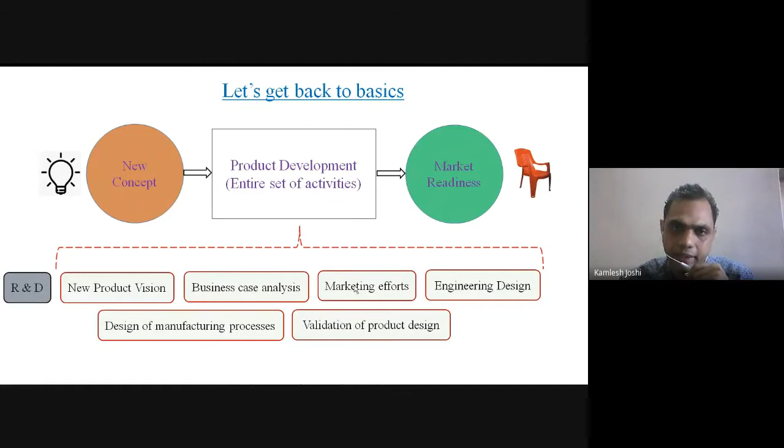So product design is a set of technical activities. We have a set of technical or engineering activities in product development, and a set of non-technical activities. The set of technical activities within the product development process is product design. It is aimed to meet the marketing and business case vision, and establishes solutions to problems not solved before.

Also, it provides new solutions to problems which have previously been solved—that is, creating new solutions to existing problems.

Previously there were different photocopiers, different methods to copy. When laser photocopy came, it disrupted the previous market. So whenever an original invention happens, it disrupts the previous market.

However, there is a higher risk with original invention. If the invention does not work in the market, we don't know the mood of the customer—how they will adopt the technology, whether they will adopt it at all, or at what pace. So there is high risk associated with original design.

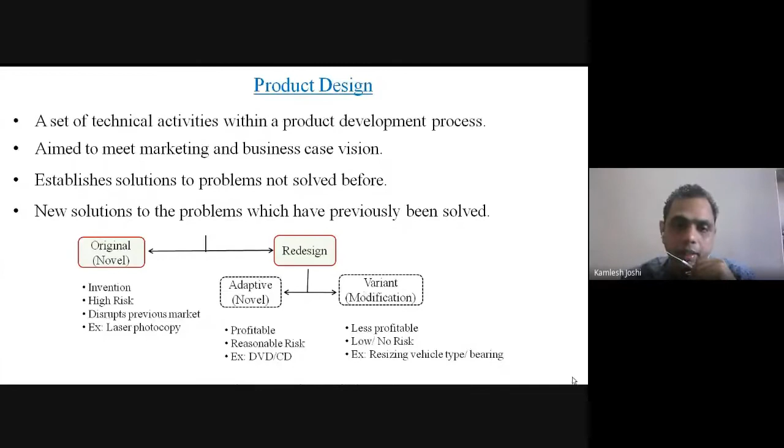So we can see DVD is an adaptive redesign, which is profitable with a reasonable risk. The risk may not be as high as original invention, but it still has a reasonable amount of risk.

In variant design, we are not doing any novel invention, we are just doing modification. We are changing the size, shape, and parts.

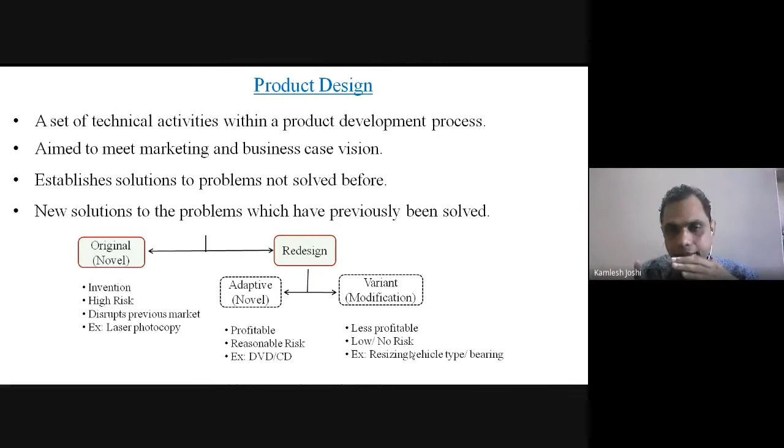We are resizing it in one way, like the newer versions of a car or the facelift of a car—they are just resizing, just changing the size, making the vehicle larger or smaller. They are changing the bearing, its size or shape. So they are just making a variation of it.

Variation is not as profitable as original or adaptive design—it is less profitable. However, the inherent risk with variant design is also low, so people also do variant redesign.

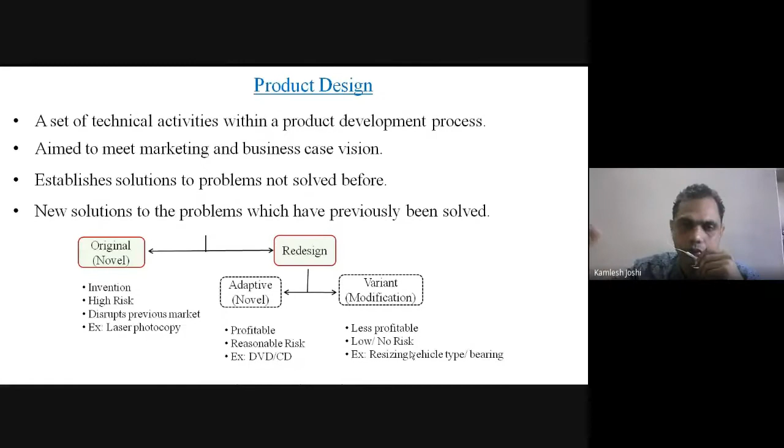In product design, we will focus on engineering design. Engineering design is where modeling is used to attempt the design task, done to make the process quick, accurate, and cost effective. There are different types of engineering design: mechanical design in the mechanical field, and in electrical engineering, electrical engineering design, architectural design, and industrial design.

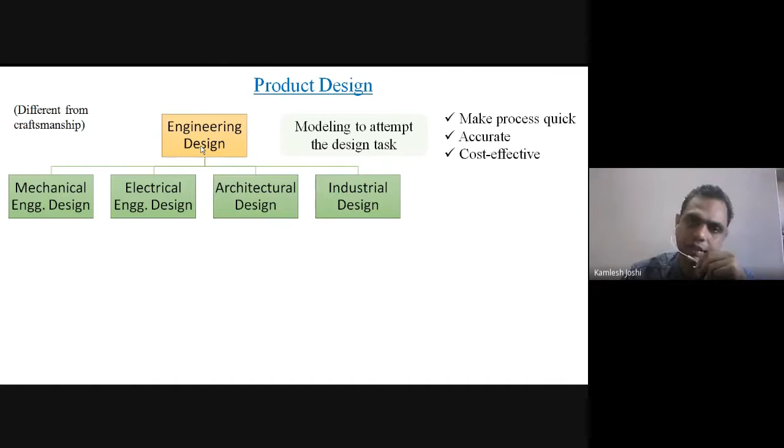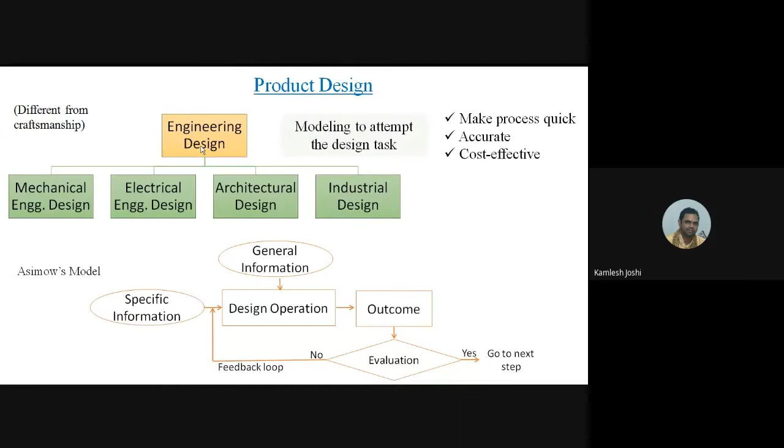A general process of how engineering design is done is given by Asimov's model, where we have some general information and specific information about a product, which is taken care of, and the design operation is performed. The output is then evaluated to see whether it gives the satisfaction we want from the product.

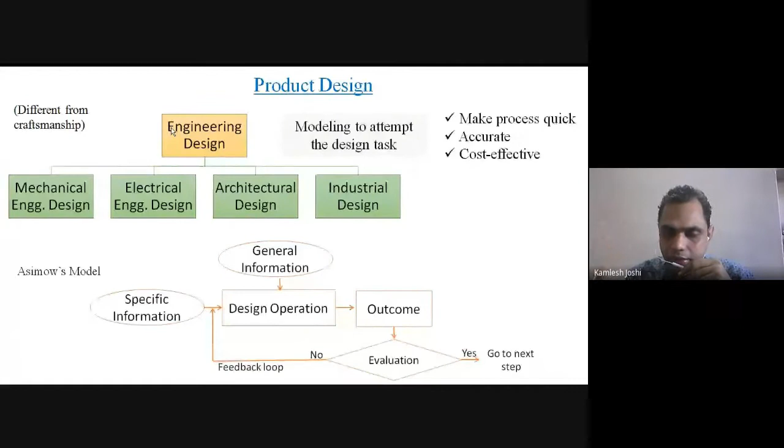If it is not satisfactory, then specific information is provided again—what are the needs still lagging in the product—and the product is refined for that need.

So in order to understand product design, we have to understand the product development process, because product design is a part of it. There are some basic steps in product development, technical or not, and it is advised for a product designer to be with the product development team to understand what is going on from the first process up to where product designing starts. So we have the modern product development process.

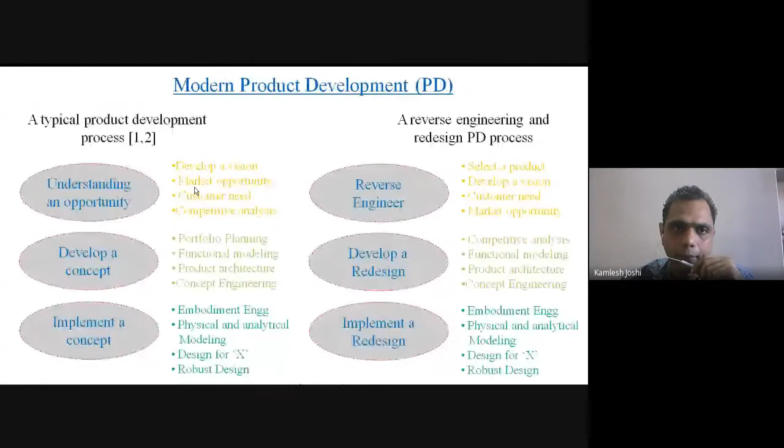The first step is to understand the opportunity. For understanding the opportunity, we have to do market analysis and customer need analysis. We will look at market analysis. In market analysis, we have to ask: what to develop? That is the first question that comes to mind.

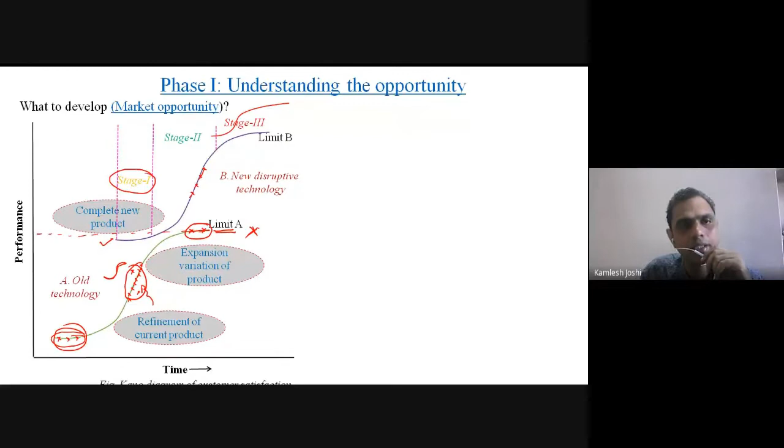If the technology is in stage one, it is a very good stage. We can go into the market, do some refinement, improve the product and deliver it. If it is in stage two, the competition is very high, but the chances of getting success are moderate.

But if a product is in stage three, it is very difficult to improve the product at this stage, and also very difficult to form a new concept which will destroy the current state of the product and create a new S curve to follow. If we are looking for a new concept to disrupt the old technology, the risk of failure is very high, but if the concept succeeds, the profit from it will be very high. So we have to see at which state the product is, and then understand the opportunity in the market based on the current state of the product in the S curve.

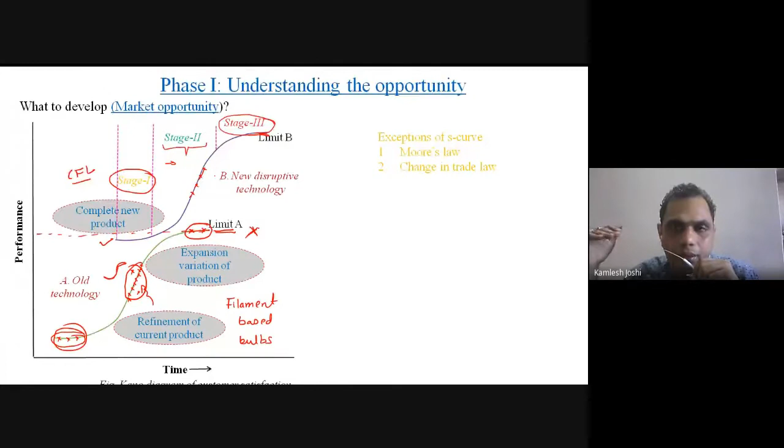So this is the limitation of the S curve. If some trade law changes, or government policy changes, then our product will not follow the S curve. Another exception is Moore's law. So what is Moore's law?

Moore's law tells us that the number of ICs, the number of transistors on a unit surface area of an IC, gets doubled every 2 years or 18 months. So if you can see from the 1960s, when IC technology started, it does not follow any S curve—it just follows a straight path, and it keeps on increasing.

Until now, it is just following this straight path; it has not followed the S curve. However, we can divide this straight path into a number of small S curves, because the electronics industry is changing at a very fast rate. So this line is actually following too many S curves, but they are not very big—they are very small S curves.

The size of the S curve depends upon the rapid growth in the technology, and these small S curves are making a line. So there may be a point in the coming 2 to 5 years where Moore's law will stop, and transistors will not follow Moore's law anymore. That may be a chance.

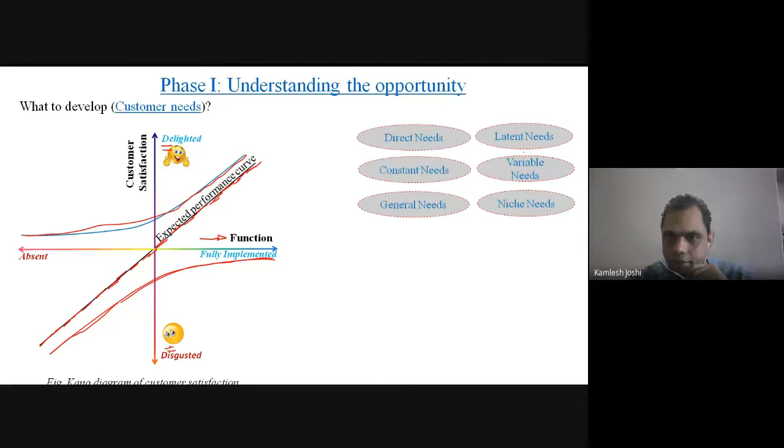There are some needs which are latent needs. Latent needs are those which the customer needs but will not tell directly. We have to ask a lot of questions over time so that the customer understands and then tells us these needs. Latent needs are those which help in delighting the customer, because the customer does not expect these needs. So these are unexpected.

Direct needs are something which the customer always expects.

Then there are constant needs, variable needs, and general needs which are required by all age groups and all genders, irrespective of age or gender. And there are niche needs, where only a certain small group of people need those needs. They are not highly required by the general population, like a highly good music system in a car — it is not required by a lot of customers, but it will be the requirement of a niche need.

So we have to classify different needs: what are the needs expected by a general customer, and what are the needs which will delight the customers.

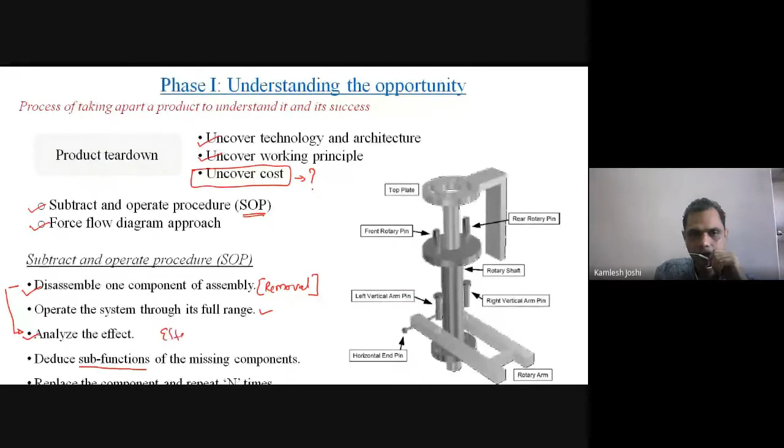First, we have to disassemble any component from the assembly. We'll disassemble one component from the assembly. After disassembling it, we'll operate the product through its full range and analyze the effect - what is the effect of removing one particular component from the product? This will help us in deducing the sub-function of the missing component. So we removed one component, operated the product to its full range, and now we can see the effect. This effect helps us find the sub-function of the missing component.

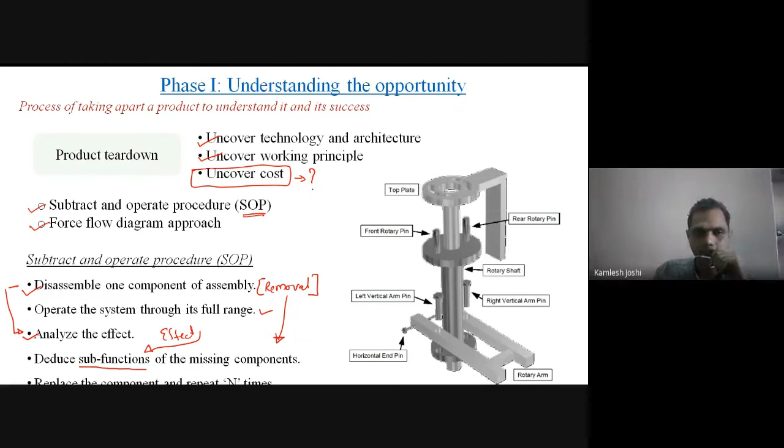Then we will replace the component to its original position, and take another subcomponent of the assembly, remove it, and repeat the procedure for all the components. So this is what we mean by replace the component and repeat the procedure n times. We can understand this with the help of a diagram.

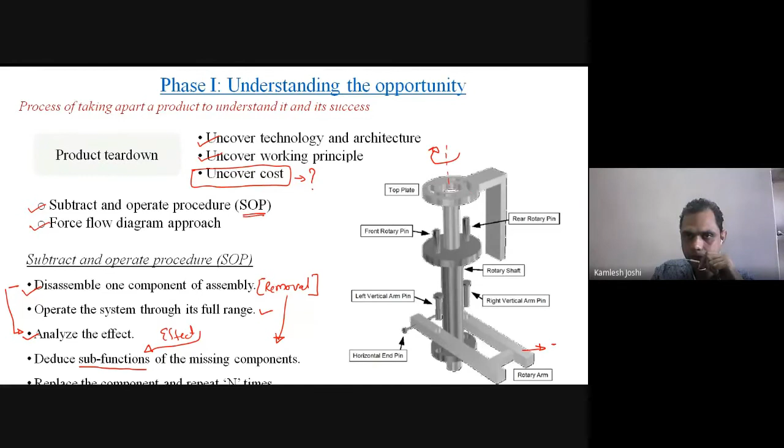So this is an assembly which converts the rotary motion of this arm. We have this arm which has a rotary motion, and it converts into the to-and-fro oscillation of this arm. So this is a top plate, and there are some slots in the top plate. The diagram is not that clear from the book, so let me draw it.

These are the slots, and in these slots there are two pins. This is pin number 1, and this is pin number 2 - the rear side pin and the front side pin. They get inside this slot. So when this part moves, it helps in moving this main shaft. Because this shaft is attached with this pin, it will move, and when these pins go inside this rotary arm, the arm will rotate to a certain angle.

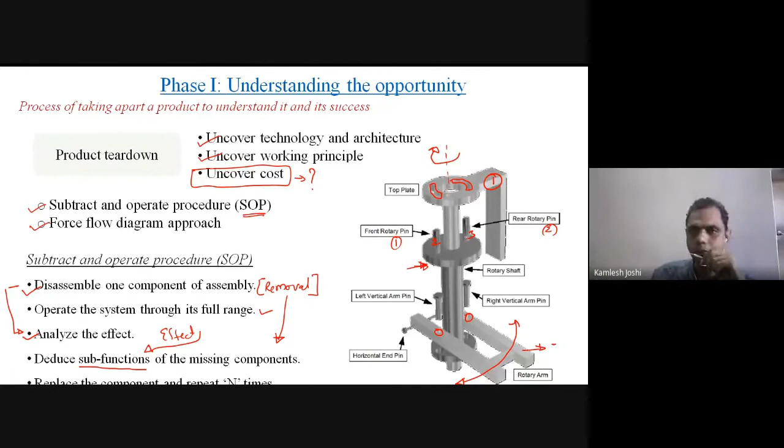We have to apply the subtract and operate procedure on this product. Let's start by removing the first part. This is part number 1, this is part number 2, part number 3. Like this, we can number the various components of the assembly, and then we'll remove them and operate the procedure.

We can remove the first part, and then rotate. You can see that if we are rotating, we are not able to provide any input to the assembly, so nothing will happen. So we can deduce the sub-function of this part is to provide rotary input to the system.

Similarly, we can replace the pins. If we replace the front rotary pin and operate the assembly through its full range, nothing will happen, because there is an additional pin here. So what we deduce from here is that the pin is a redundant pin. We don't need two pins at this position; only one pin is enough to transfer the motion from the top plate to the rotary shaft.

Likewise, here also we have two pins which are transferring the motion from the rotary shaft to this rotary arm. If we replace any one pin, it won't affect the function of the product.

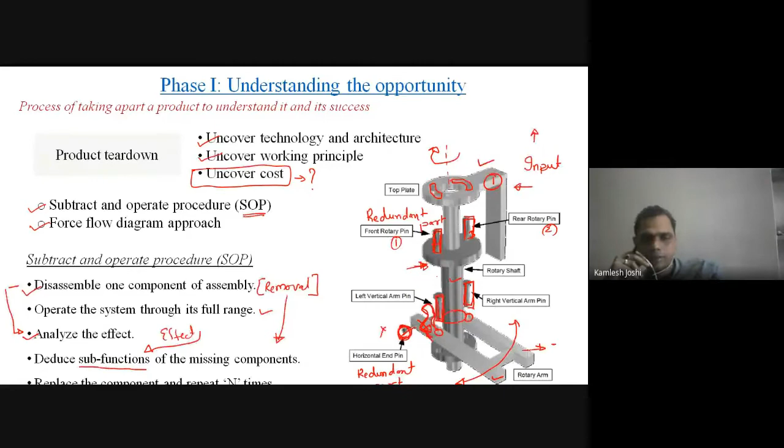Then, benchmarking by function. We have to benchmark by function, not by component. So any component in one product may not be functionally equivalent to a similar component in another product.

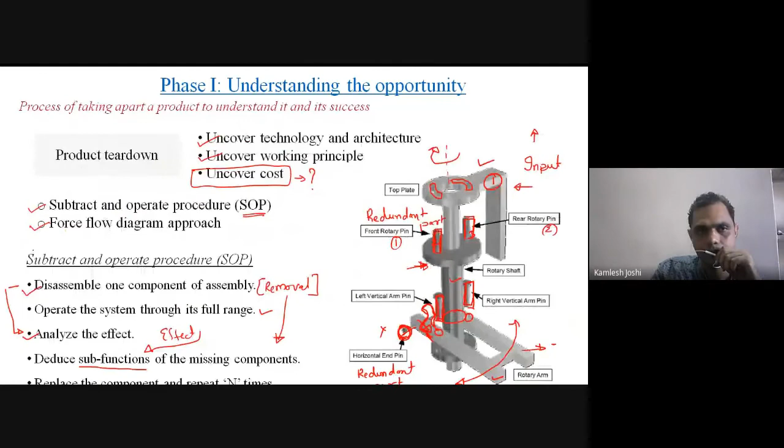This will provide a list of successful products in the market along with the design key issues. What are the key design issues for which we have to tear down the product?

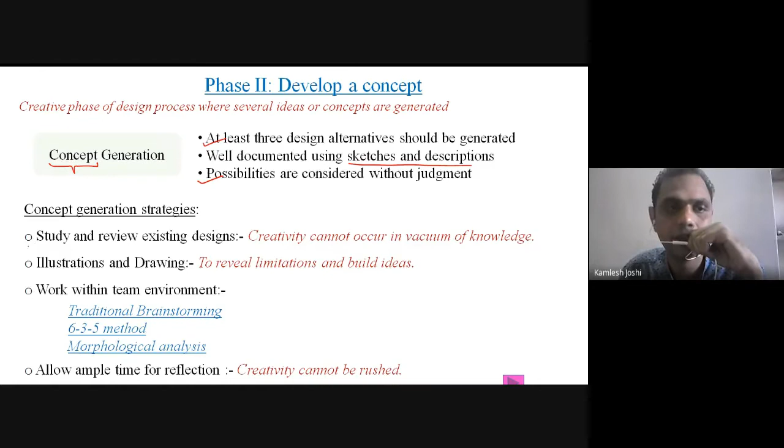Various concept generation strategies require us to study and review existing designs, know customer needs, and have an idea about the product from the previous step, because we have done the benchmarking and analyzed the market. Now we have to provide a solution, generate a concept, and study and review existing designs.

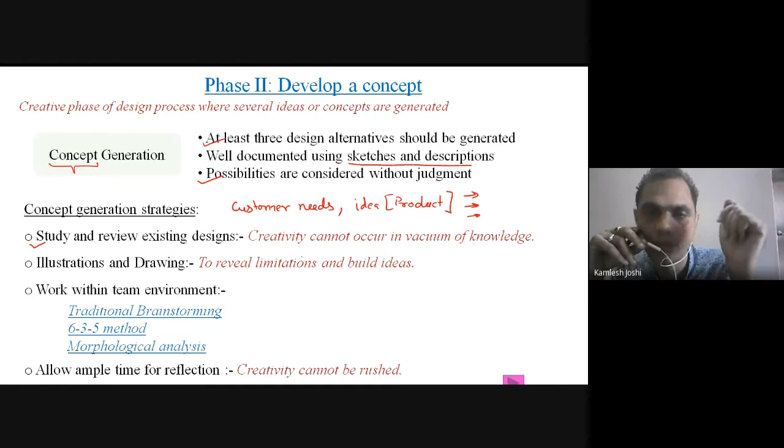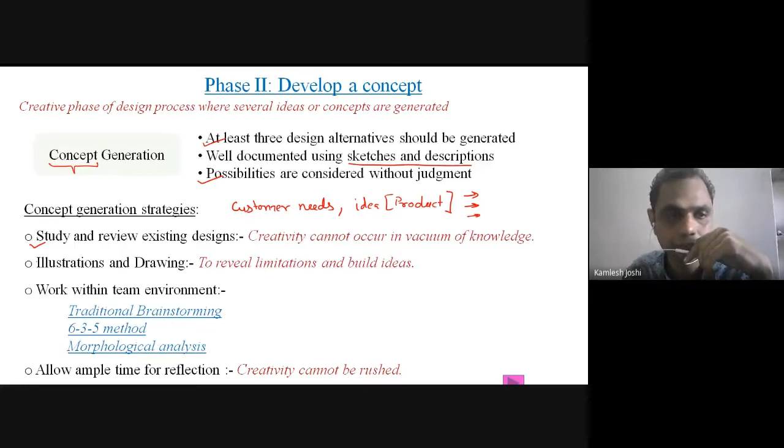The study and review is required because concept generation is a creative phase of product development, and creativity cannot occur in a vacuum of knowledge. So we need to keep doing the analysis from time to time to keep us updated. Illustration and drawing are required to reveal the information and limitations of the ideas we are trying to develop. Then we can use different techniques like brainstorming, the 6-3-5 method, and morphological analysis to generate the concept.

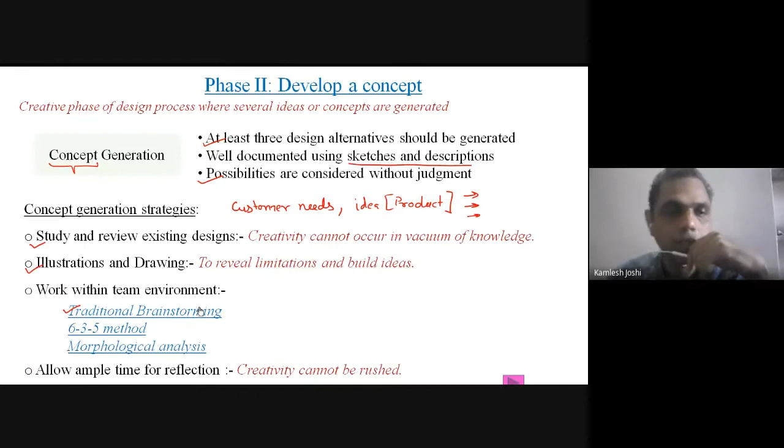We'll go in brief about these techniques, traditional brainstorming. So the brainstorming technique was popularized by Alex F. Osborn in his book Applied Imagination in the year 1953.

So we have a problem here, and we have to get the solution of the problem. The rule during brainstorming is that no one should be judging ideas of other people. So we can sit in a group, and it is an oral method. The people can give their solutions to the problem which is already there, and there is a moderator who will keep account of what ideas people are giving, and they can discuss about those ideas.

So free thinking is there. The rule during brainstorming is there, no judgment should be there about the ideas of other people. Free thinking should be there. We want ideas from people in big numbers, so that a lot of people can give their ideas and we can discuss over the ideas. The group size should be sizable, so generally 6 to 10 people can be there in the brainstorming.

Then we should define a problem. Already we should clearly define a problem and give to the people that this is the problem and we have to discuss about it. The people will be given ample time to react, to give their ideas, and we have to record the ideas in the form of writings, drawings.

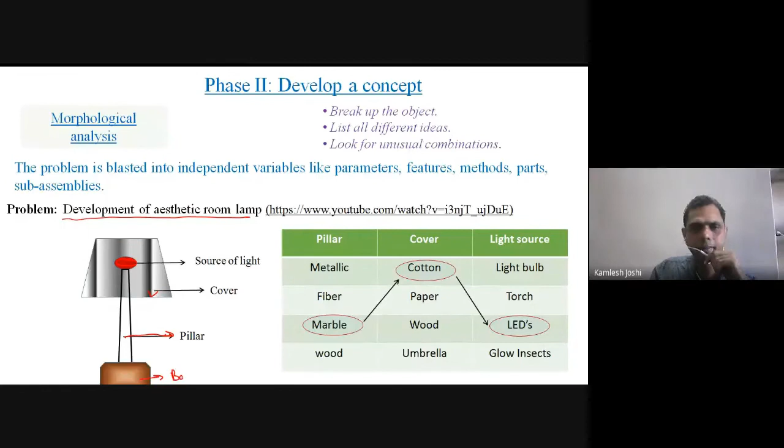Then we can write in a sheet all the different parts and what materials, what methods we can use to make this particular part. So one participant will give the idea that the pillar can be made of metallic material, the cover can be cotton cloth, the light source can be a light bulb.

Another member can say that the pillar can be a fiber type, the cover can be paper. So these are the different ideas from different people.

Now what we have to do is look for the unusual solutions. What are the unusual solutions here? Let's say we take one idea from one person, then another idea, and then another idea. Now this is an unusual solution, and then we can think of making a design of the lamp using this unusual solution.

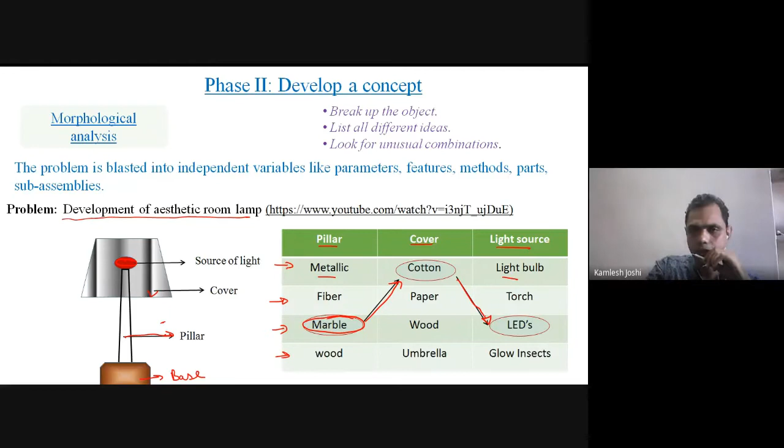So these are some techniques which are used to create different products. One example of this technique is this night lamp. It is developed by Philippe Starck, who is a famous French architect and designer. So this is how his idea is there. You can go to his website and look at the various products of his.

However, there are a lot of different ideas, so structured decision-making methods are required to check the technical feasibility and refined technical decision-making. Effective decision-making techniques are required to avoid not considering new ideas, because there is a problem with developers that they are not ready to accept new ideas because those ideas are foreign to them. This causes market failure to the product.

Another effective decision-making strategy is that we have to fully consider the different ramifications and effects of a decision. If all the customer requirements are not considered in the idea, then the product may lead to market failure. And if the product is not analyzed for safety, it can lead to accidents and hazards.

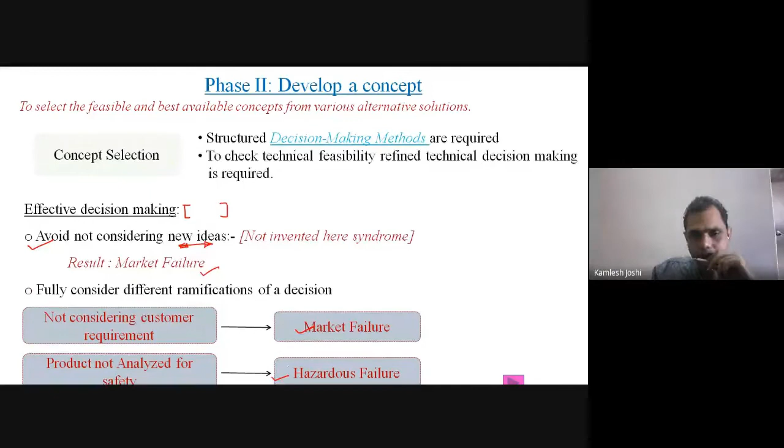So while making the decision, while creating the ideas, the next step is to see whether we are considering new ideas or not, whether the idea fulfills all the customer requirements, and whether the product is safe for usage or not. So we have to analyze the product for safety.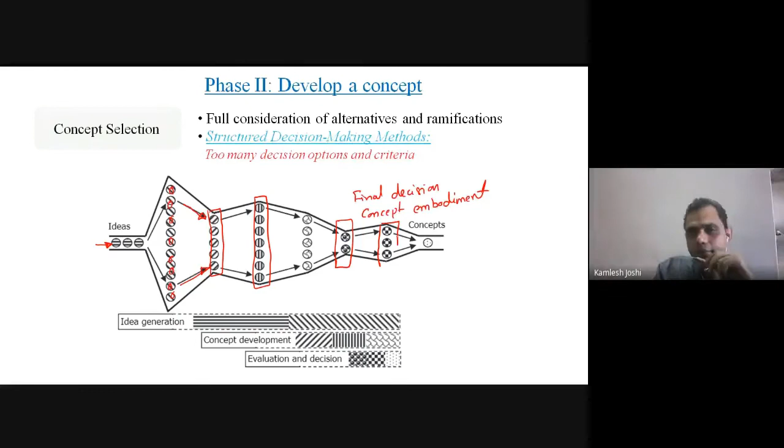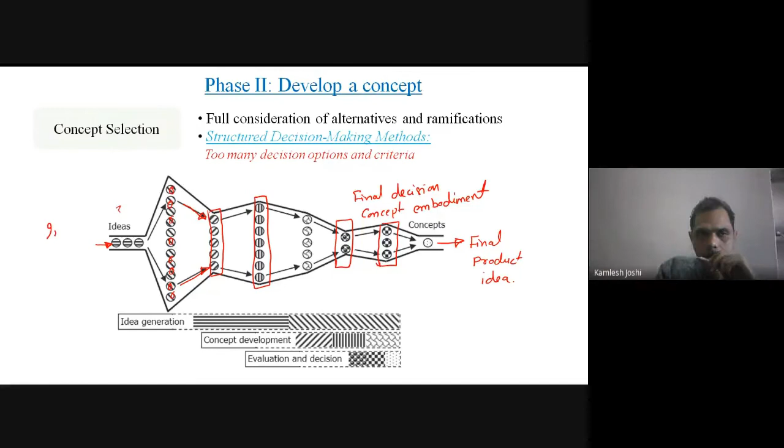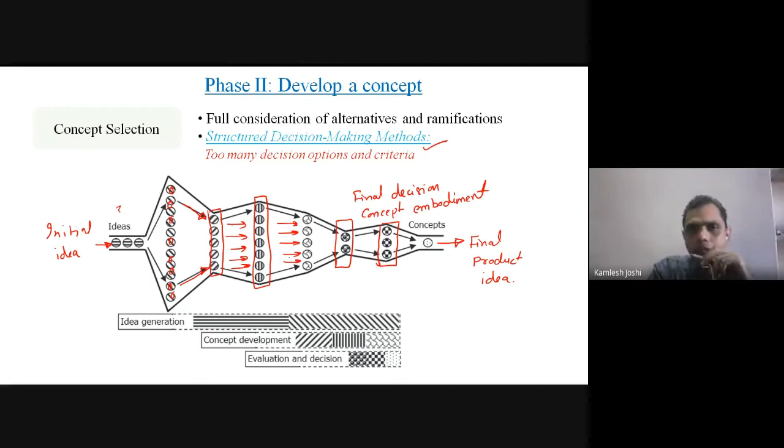This is the initial idea. So to refine these ideas, we should use some structured decision making methods to get the ideas which are profitable and to remove the ideas which are not good.

In order to do that, we have to consider something known as criteria, which will come from customer need, and alternatives, which will come from the brainstorming generation phase.

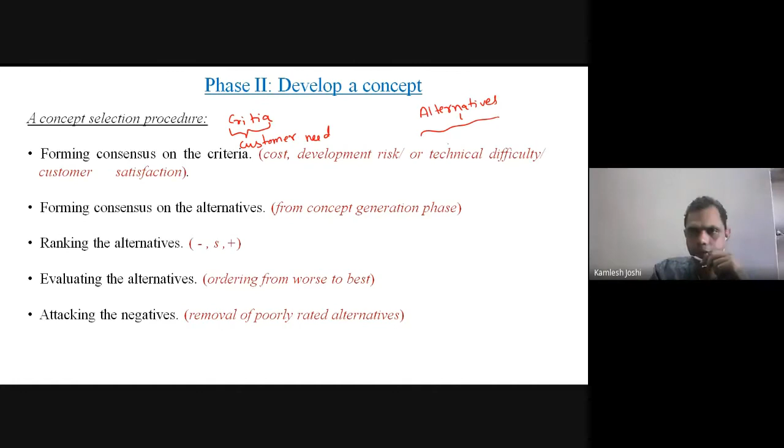So what are the criteria for which we want to design a product? Whether the criteria is about the cost, or development risk, technical difficulty. So all the criteria should be marked.

What are the alternatives which are understood from the concept generation phase? We have to decide the alternatives. Then ranking will be given to the ideas and alternatives. The alternatives will be evaluated for the criteria, and the negatives, the poorly rated alternatives, will be removed.

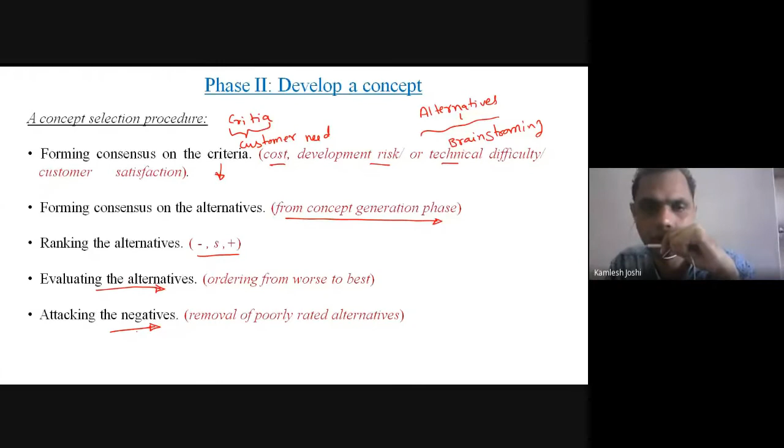This can be understood with a method, the Pugh concept selection method. This method was given by Stuart Pugh in 1990.

Let's say we want to select a better light source. We have some alternatives: an incandescent bulb, CFL (compact fluorescent lamp), LED, and halogen light. Which one is a better light source? However, what do we mean by better?

What is better? In order to define better, we have some criteria, some customer needs. Customer needs say that the light output should be high, the power output should be high, life of the product should be high, the cost of the product should be low, the size should also be small. So these are the criteria.

We want our light to give a high light output, high power, life should be higher, the unit cost should be lower, the size should be lower. We can add more criteria like the electrical consumption should be lower. So these are the customer needs, and we have alternatives.

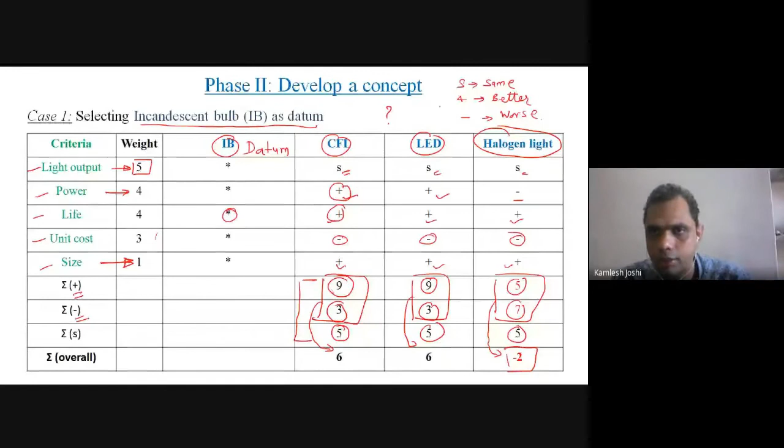So this is how we have different alternatives from the brainstorming method. We have design criteria from customer needs and stage 1. We use a method like Pugh selection to choose the better alternatives and remove the alternatives which are not performing well. Now we are at the third step of our process, which is to implement a concept.

The implementation of concept can be done using various ways. One way is concept embodiment, meaning the transformation of a product concept from the previous stage, which are feasible, into physical systems. So transformation of product concepts into physical systems. This is the main stage where the product design comes into a picture.

There are various embodiment design methods, which include physical and analytical modeling. We can have physical and analytical modeling, which we are discussing in detail in this course. Professor Malki and Professor Naik are discussing this process using a FEM method, the modeling method.

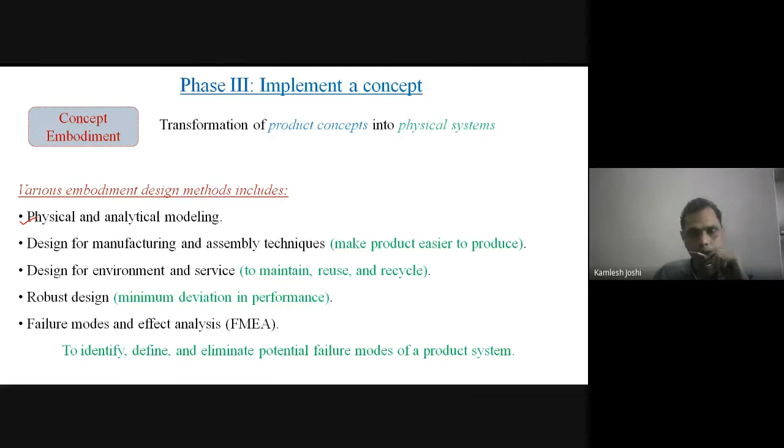The product should be designed for robustness. It should not deviate too much from its performance; it should perform to its mean performance. And another way is to study the failure modes and effect analysis, FMEA. So this is the main objective of the course. I hope you will understand this part. And these are various techniques.

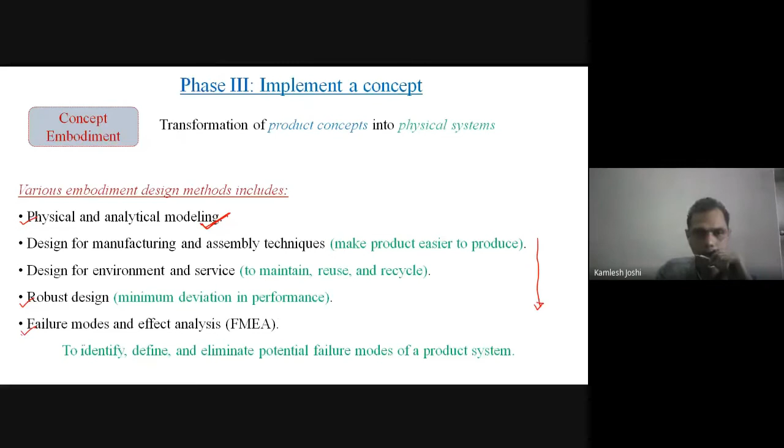We'll have a short look at failure mode and effect analysis. What is failure mode and effect analysis? Failure mode and effect analysis helps us identify, define, and eliminate potential failure modes from a product system. Failure modes are the ways by which our product can fail. We have to identify the failure modes and the effects of those failure modes, which will help us make a product safer.

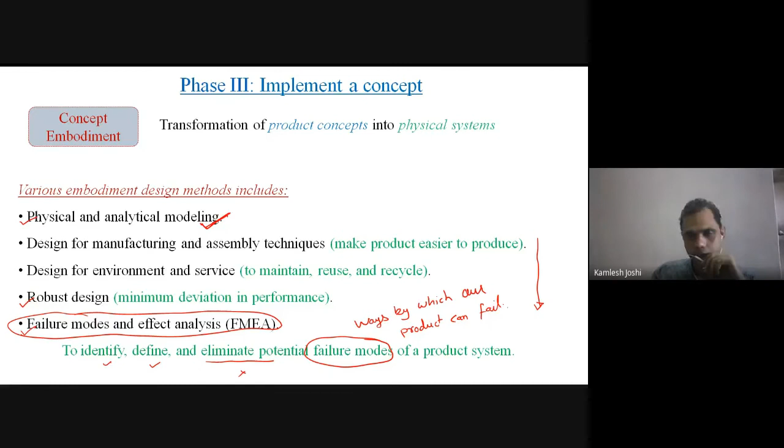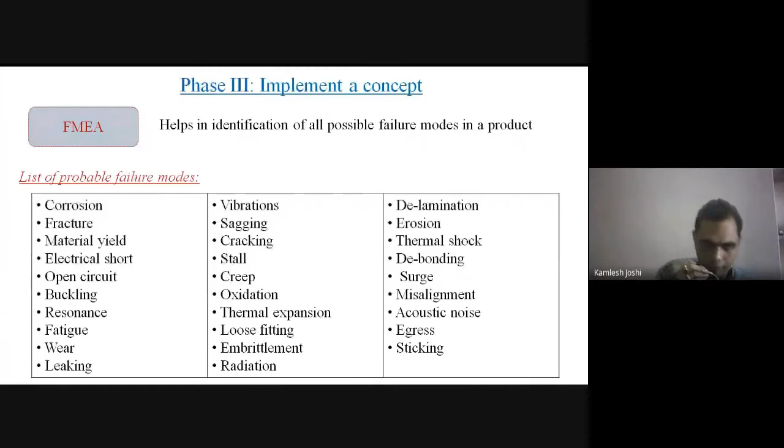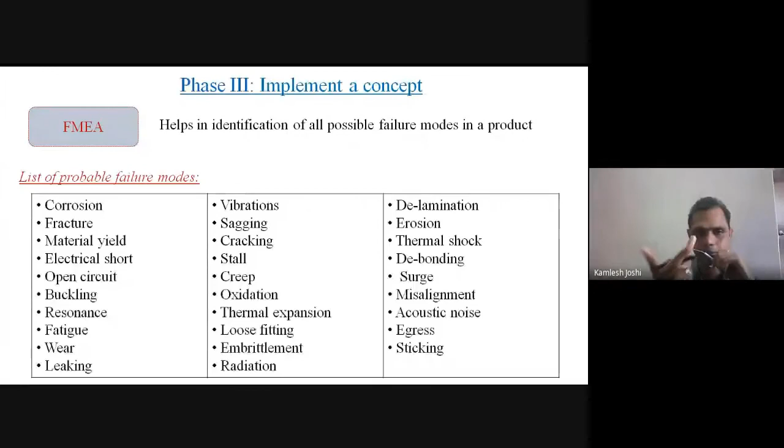So there can be different failure modes of a product. I have listed down some of the failure modes. Our product can fail by corrosion. Our product can fail by fracture. If it is an electrical product, then electrical short circuiting can be there, or there can be an open circuit, so the product will not work. Wear can be there, delamination can be there. So we have to first list all the probable failure modes of a product.

So if we have a product, what are the possible failure modes of that product? And then we have to find the effect. So this is the general FMEA analysis. First step is to identify all the failure modes of the product. Then we consider any one of the potential failure modes.

We identify the potential effect of a failure mode, that is done by severity. So this is effect severity, denoted by S. Let's denote a product's severity on a scale of 1 to 10. If the failure mode severity is not too much and it is safe to operate, then we'll give a low rating of 1. And if the failure can be very hazardous and take the life of a person, then it can be given a higher rating of 10.

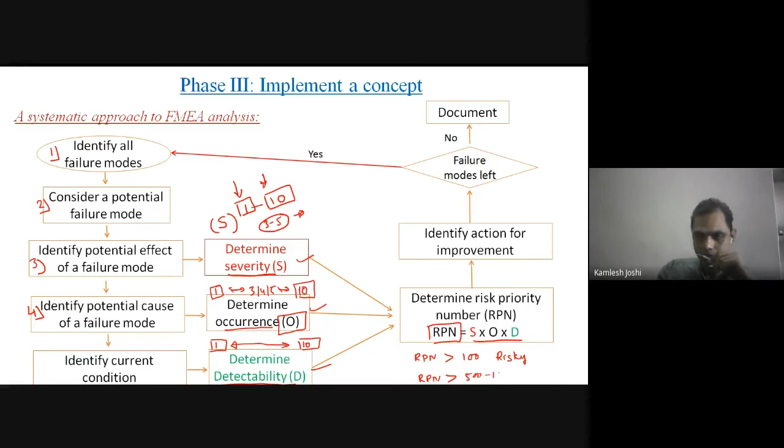So we have three ranks: severity, occurrence, and detectability. We multiply all these ranks to get a number called the RPN, risk priority number. If this risk priority number is greater than 100, the product is risky and we have to eliminate the failure mode. If the RPN is very high, like 500 or 1000, this should be taken care of immediately.

The possible cause of the failure mode should be removed from the product, and then the product should be rechecked for different failure modes. This is how we identify an action for improvement. If the RPN is less than 100, there is not much requirement to remove or improve the product, and we can either document all the failure modes we have taken care of, or go for the remaining failure modes. This is a systematic approach of FMEA analysis.